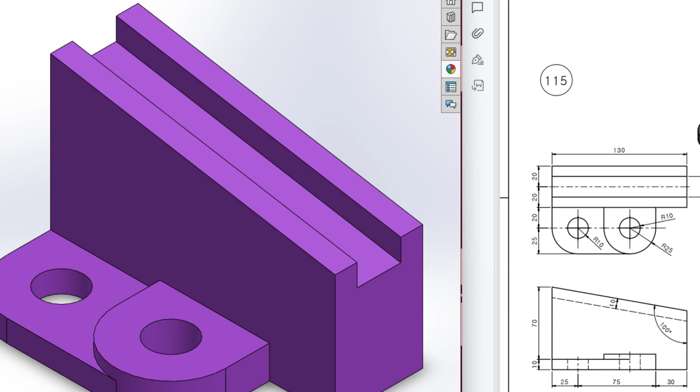Today we are going to solve this 3D problem. In this 3D problem, this is the isometric view, this is the top view, this is the front view, and this is the right side view.

First of all, I will start drawing from the front view. In the front view, I will draw a line of 70 plus 10 unit, and then I will draw a horizontal line of dimension 25 plus 75 plus 30. After that, I will draw two lines and make this angle of 100 degree.

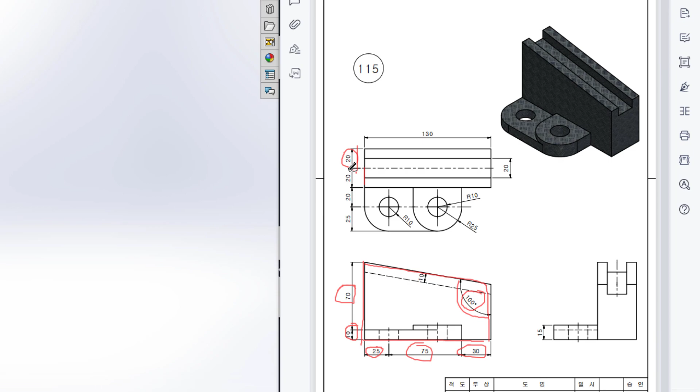After making this 100 degree angle, I will extrude both it in direction 1, 20 unit, and in direction 2, 20 unit. So first of all, let's select the front plane.

Now select sketch. Now select line. Now draw a vertical line of dimension 70 plus 10 unit.

After that, again place the line here and draw a horizontal line of 25 plus 75 plus 30 unit.

Now draw a vertical line again and draw an inclined line. Now select smart dimension and dimension these two lines to 100 degree.

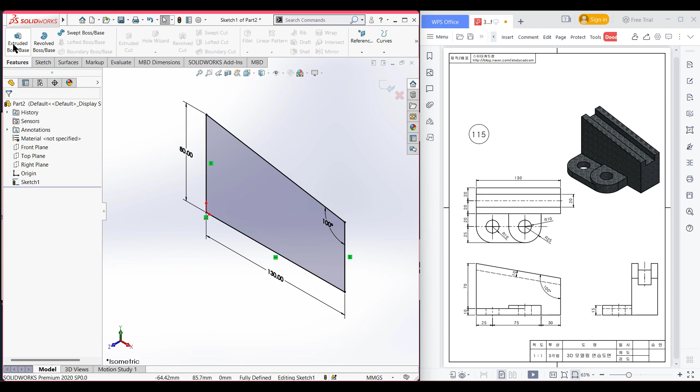Now press OK. Now isometric it for a better view. Now go to features and extrude boss. Extrude boss it to direction 1 is 20 unit and direction 2 is 20 unit.

After that, press OK. Now here we can see we have another extrude cut here, and this extrude cut portion has an offset line from this line to this line of 10 unit, and we have to extrude cut it to 20 unit.

So first of all, I am selecting the front plane again. Now sketch. Now normal to it. Now select this line and convert into this, and now again select this line.

Now you can use the offset into this. Now reverse the direction. Now press OK. Now select this line and select this line.

Now convert into this. As you can see, this shape isn't closed here, so I am selecting a line and closing this shape.

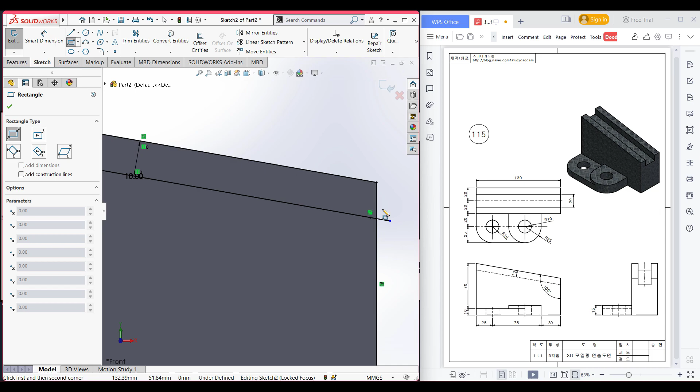After that, select the trim option and trim all the unnecessary parts we don't need. So zoom in and trim the part.

Now press OK. Now isometric it for a better view. Now go to features and extrude cut.

Now extrude cut it to direction 1 is 10 unit and direction 2 is 10 unit, because we are drawing this from the middle surface. Now press OK.

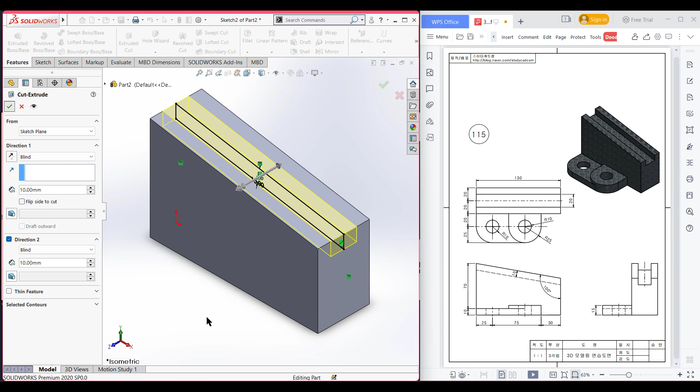Now in the top plane we can see we have this shape and another form of this shape. First of all, I'll draw this shape, and for this I will first draw a circle of 25 radius. Then I will make it a semicircle later, but first I will draw a circle of 25 radius. Then I will dimension it from this midline.

From here it will be 25 plus 75 minus this 25 unit. So the horizontal dimension will be 25 plus 75 minus this 25, and the vertical dimension will be 20 unit from this horizontal line. After drawing this circle of 25 radius, then I will draw two vertical lines from here and here.

Then I will convert this line and trim all the unnecessary lines to make this final shape. After drawing this shape, I will draw an inner circle extrude cut of 10 radius. Then I will extrude boss it, and if we see at the right plane, we can see it will be extrude boss of 15 unit.

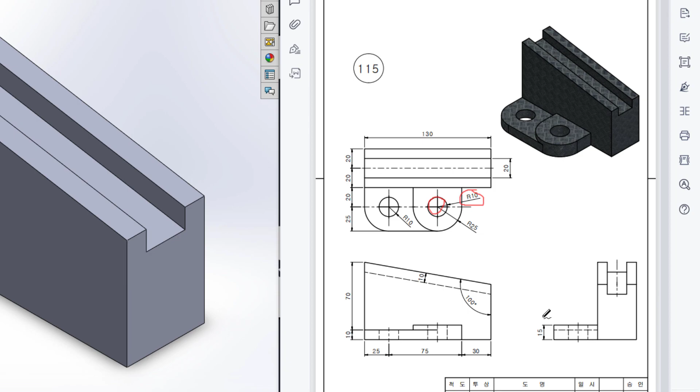So I am selecting the top plane. Now sketch. Now normal to it. Now select a circle. Now draw a circle of 25 radius. Now select smart dimension. Now select this line and this vertical line and dimension it to 25 plus 75 minus 25.

And now select again this line, and from this horizontal line, the dimension will be 20 unit. Now press OK.

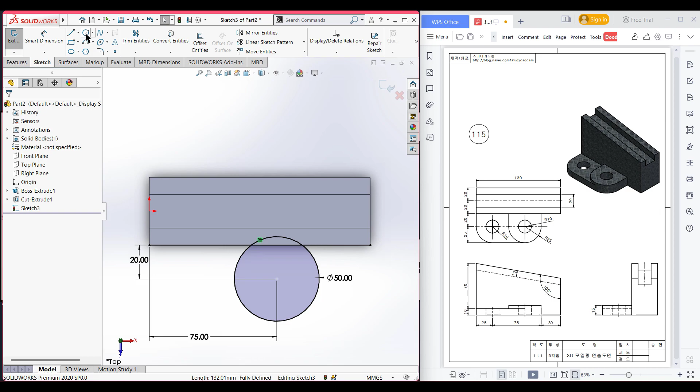After that, select this line and convert entities. Now select line option. Now draw two vertical lines, and also draw another vertical line from here.

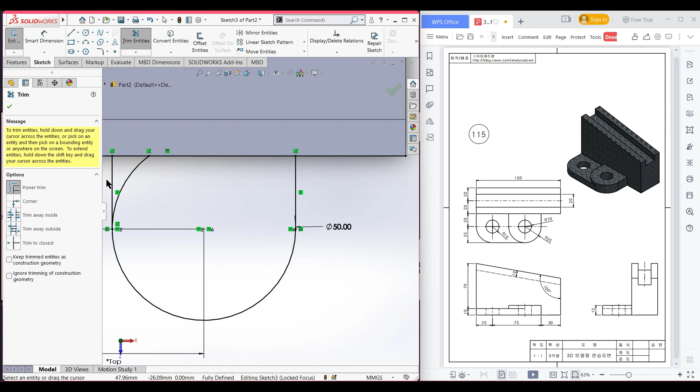Now select the trim entities and trim all the parts we don't need. After we have done our trimming, now you can select the circle because we need to draw this circle of 10 radius. So select pointing this circle here and draw a circle of 10 radius.

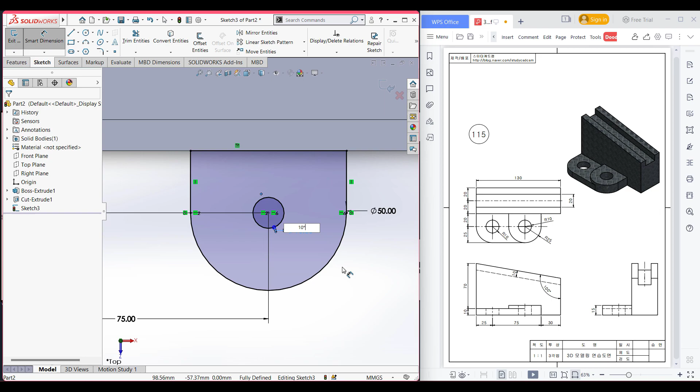So the total dimension will be 20 diameter. Now isometric it for a better view. Now go to features and extrude boss. Now extrude boss it to 15 unit.

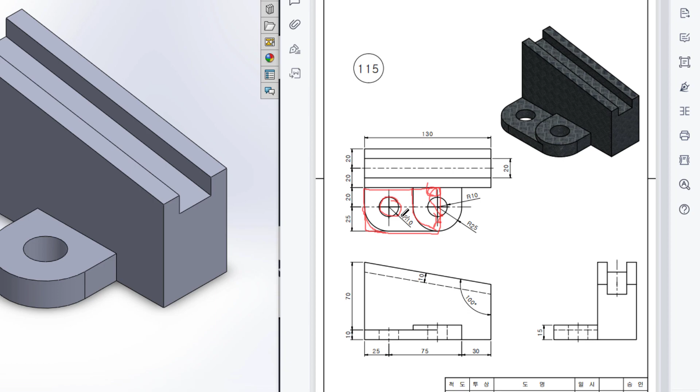After that, again I will select the top plane, then I will draw a corner rectangle like this one, then I will convert into this line, and after that I will trim this portion. From that line I will fillet here, and then I will draw an extrude circle of 10 radius.

Again selecting the top plane, now sketch, now normal to it. Now select the corner rectangle and draw a corner rectangle like this one. After that,

Press OK. Now select this line and this semicircle. Now convert entities. After that, select the trim option and trim all the unnecessary parts we don't need.

Then go to the fillet option, and as you can see in this face we have a fillet of 25, and this dimension is also 25 unit, and this dimension also 25. We can assume that this fillet will also be 25 unit.

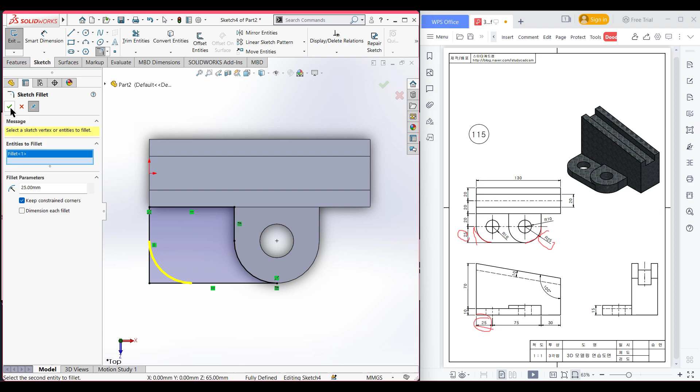So I am selecting the 25 unit fillet here, and now select this point. Now press OK. After that, select the circle and draw the extrude cut circle, and this extrude cut circle is 10 radius. Now isometric it for a better view.

Now here you can see it has an extrude boss of 10 unit, so I am extrude bossing it to 10 unit. Now go to features and extrude boss, and now extrude boss it to 10 unit. Now press OK. As you can see, we have done our 3D sketch.

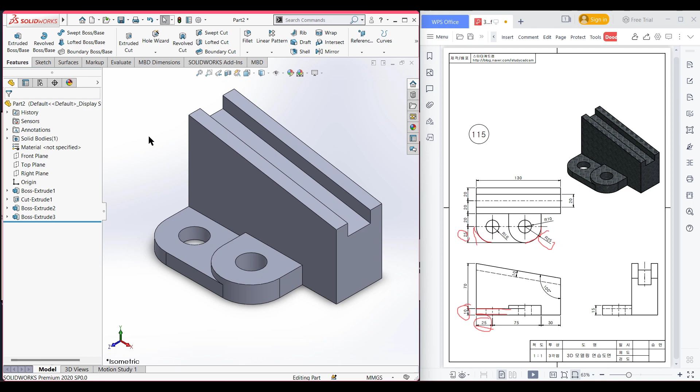Thank you for watching till the end.